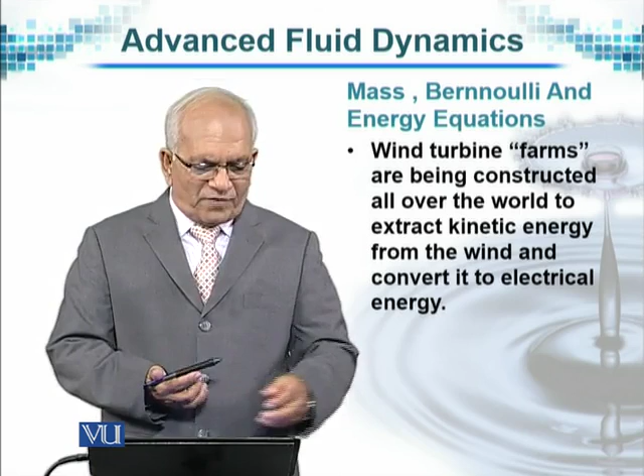So that, for example, is a good example where, in the designing of windmills that we see every now and then in the farms where these windmills are being erected and used, Bernoulli's equation is very much used in the initial stages of design.

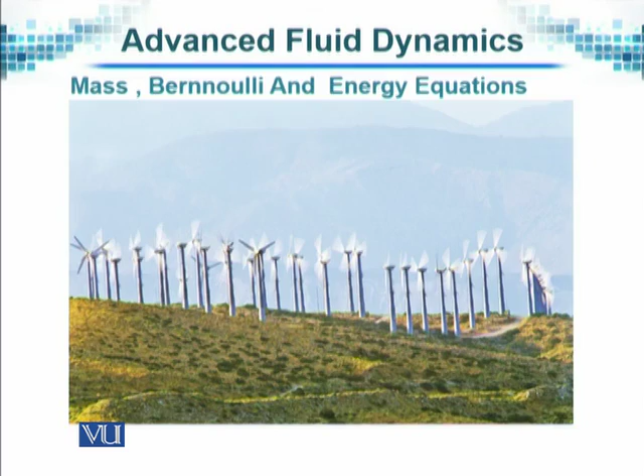So Bernoulli's equation, as you may see in the end when we derive it, looks very simple, but it has important applications even in today's new things that we are doing, although the equation was developed over 200 years ago. The mass, energy, momentum and angular momentum balances are all utilized in the design of turbines.

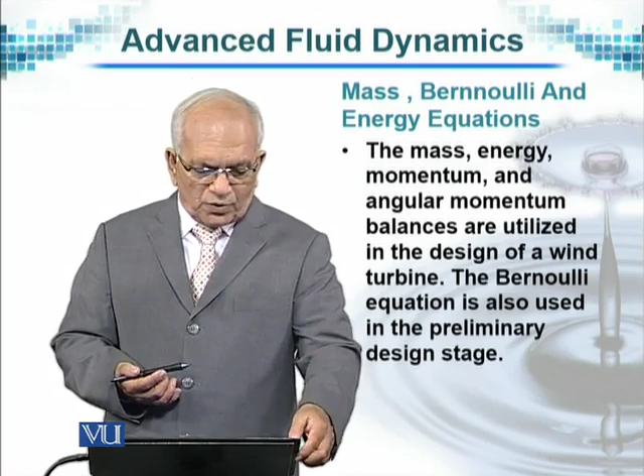The Bernoulli equation is also used in the preliminary design stage. So all these things are related, and not only related, they are used in the development of turbines, and also in windmills and so on.

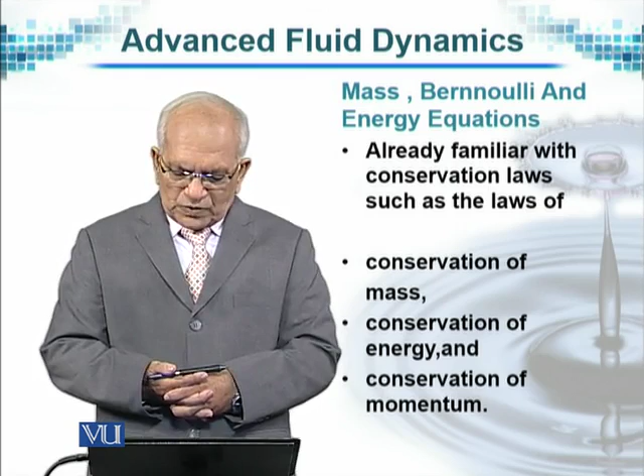So you are already familiar with conservation laws, because we study them from the very beginning, as soon as we are introduced to science. The well-known ones are the law of conservation of mass, law of conservation of energy, and law of conservation of momentum. Traditionally, the conservation laws are first applied to a fixed quantity within a closed system, and then generalized in space.

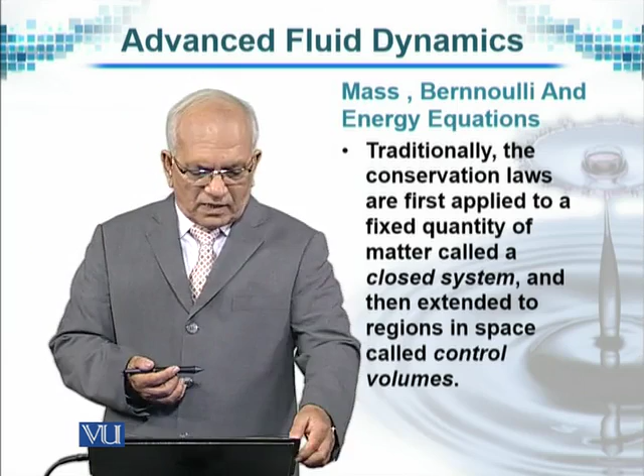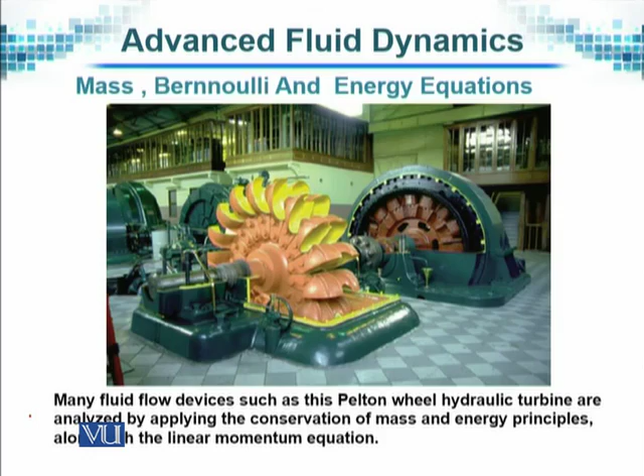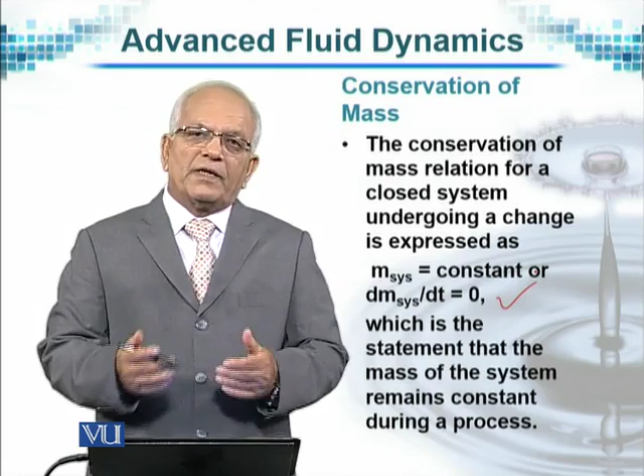If the total mass remains constant, then the rate of change of that mass must be zero, as indicated here. So this statement is re-emphasizing the law of conservation of mass. When we write it in mathematical terms, we use these equivalent terms from time to time.

Conservation of mass can be shown as the law that the rate of flow of mass coming in minus the rate of mass of fluid going out of a particular system equals the change; that is, their difference should be constant. And if it is constant, then we know that the derivative of a constant is zero.

So we write it as dm_CV/dt, and this has to be zero, or the total rates of mass flow into and out of are shown by these equations above. They are shown here as well. And similarly, the rate of change of energy will be shown as dE in the control volume in the same way.

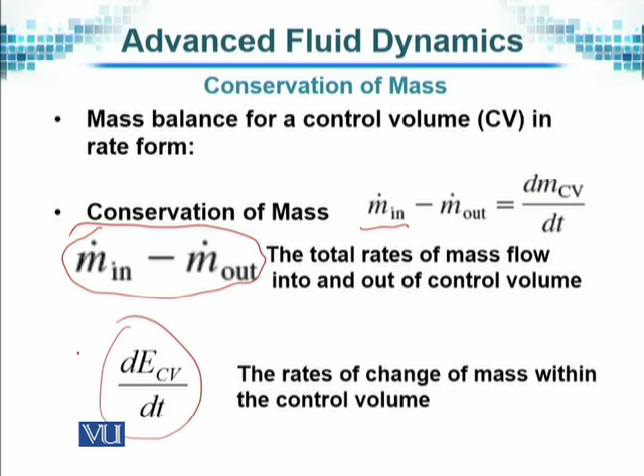In fluid mechanics, the conservation of mass relation written for a differential control volume is usually called the continuity equation. So another term we use for the conservation of mass equation is the continuity equation. And we use this continuity equation very frequently in the solution of our equations of motion whenever we are analyzing a particular flow.

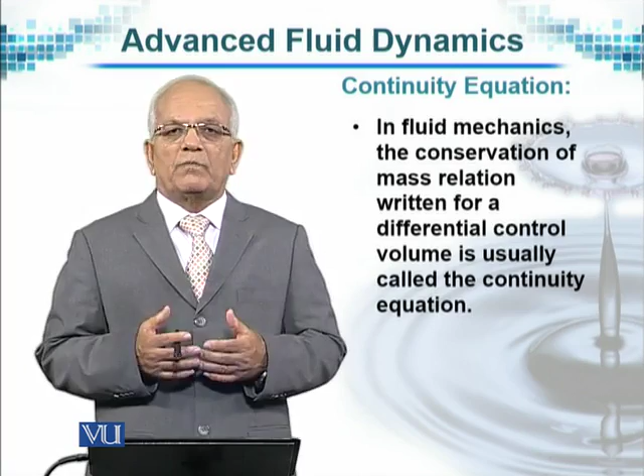So here we are just mentioning it in passing, but when we discuss the Navier-Stokes equations or momentum equations and so on, then we shall be talking about continuity equations in more detail as well.